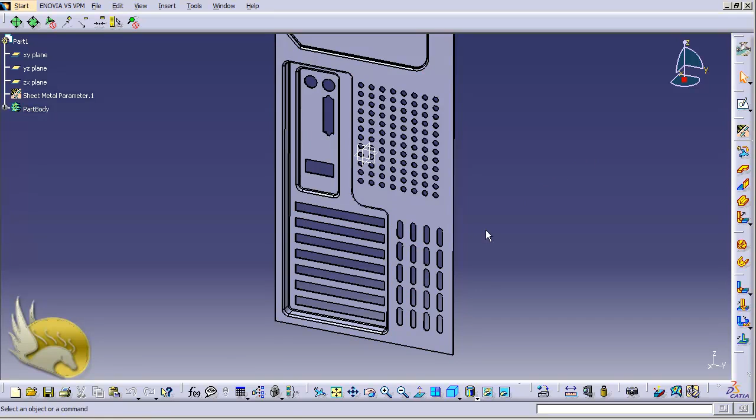Next thing I want to do, I want to add a groove between these slots. For this, I can select this face and click on a sketch so that I'm in a sketch environment. Let's zoom in a little bit and draw a simple line here between two slots. This line is going to be 90 millimeters, so I add a constraint of 90 millimeters here.

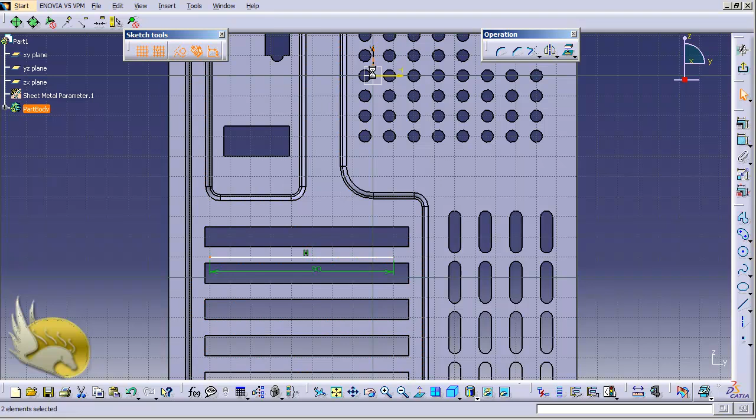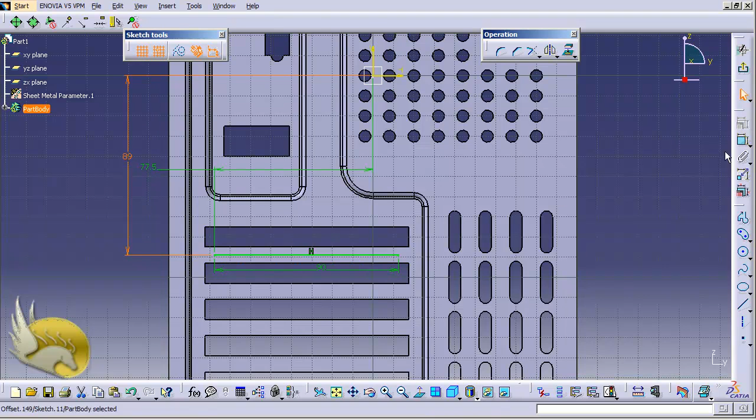Now the left point and the vertical vector are going to be about 77.5 millimeters away from each other. 77.5, and this line is about 89 millimeters away from the horizontal vector. So I type in 89 here. Now by selecting this line, I exit my workbench and go to insert menu, go to stamping, go to curve stamping. I guess I haven't selected this previously, so let's see this.

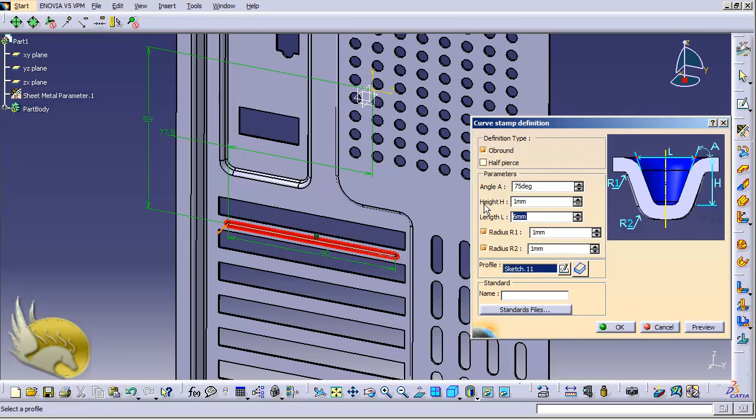And by selecting this, I want it to be outward, so I click on this little arrow to change the direction. I can see the direction is outward. The height is going to be only 1 millimeter, and the length is going to be 4 millimeters. Radii are correct, so I do not touch them. I click on OK, and I can see there is a groove that comes out of this place.

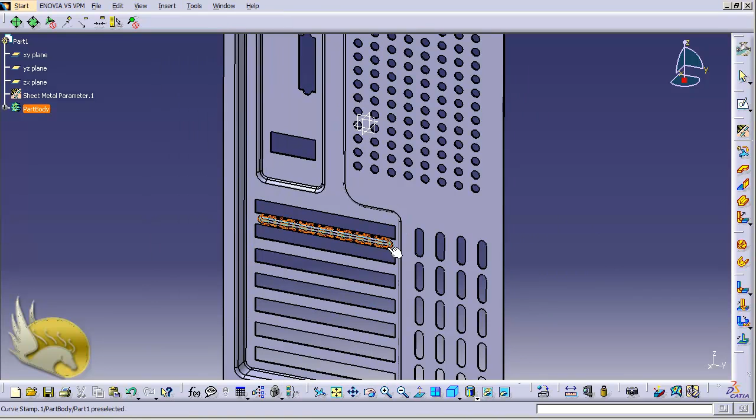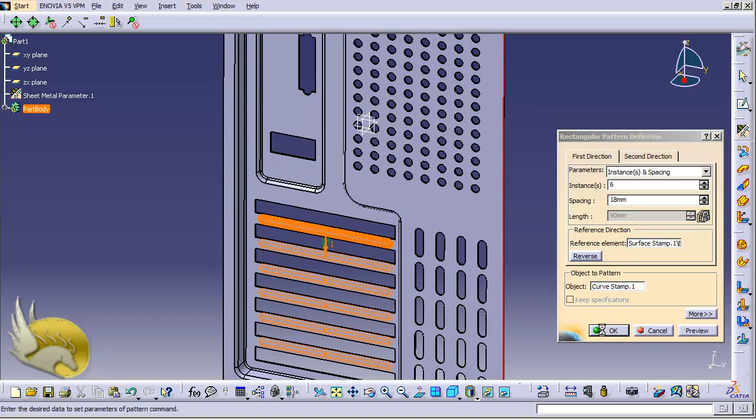Now I want to replicate this, so I go to insert menu, go to transformation and select rectangular pattern and select this curve stamp and make sure that curve stamp is selected. Now 1, 2, 3, 4, 5 and 6 instances. I need 6 instances, and the space is correctly defined because this is the space between these slots. So I click on the reference element and select this direction and click on OK. Everything is correctly defined here.

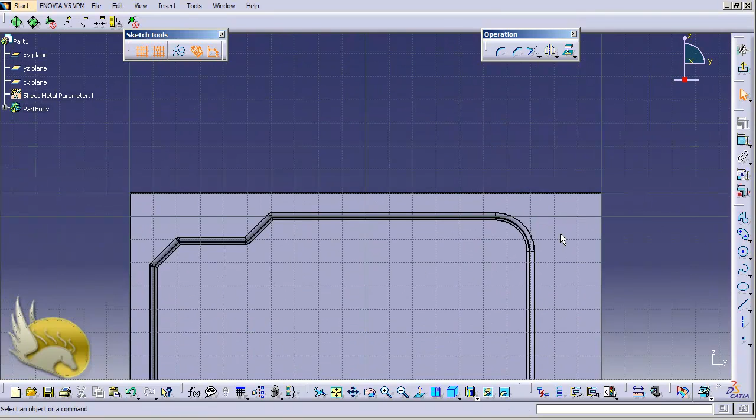Now I want to draw a very complex shape for power outlets and create this profile. So let's go up, and I want to select this face. By selecting this face and going to the sketch environment, I want to draw this a little complex shape, and for this I need 2 axes because I want to make sure that my shape is correctly defined. So let's draw this axis, and another axis is going to be vertical like this. Now by having these 2 axes, let's go to profile tool and start drawing from here.

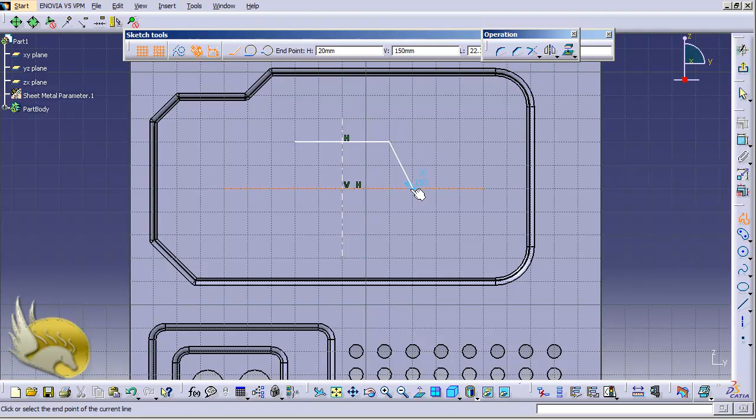This is the first, second point. I want to come down like this, come down like this, go to left, go up, and go up and finish this. Now I don't want to have the extra constraints here. I want to remove this constraint as well. Now I want to have some constraints like this. This point and this point and this axis, they should have symmetry. So I add symmetry here, click OK.

This point and this horizontal axis again should have symmetry. And I want to do the same between this point and this horizontal axis. Adding another symmetry here. I want to make sure that this is 40 millimeters. And the distance between these 2 lines is going to be 20 millimeters. So I type in 20.

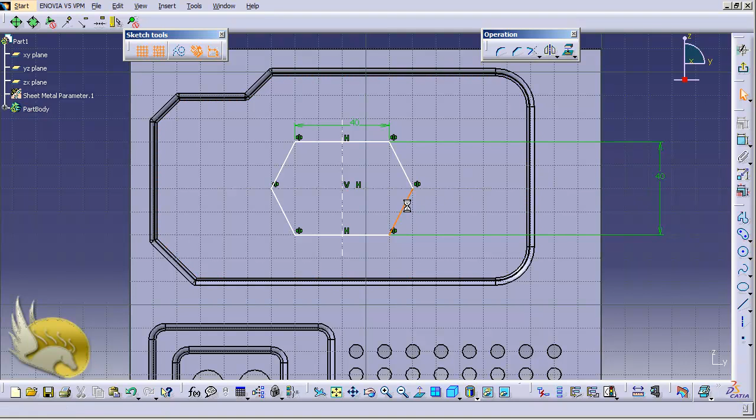Now you can see that it doesn't work like this. I don't want to have it like this. So I guess I have to define some more constraints here. For example, I want to have an angle here between these 2, and this should be about 80 degrees, and it changes shape dramatically. Let's remove this angle for now and see what I should do for the rest of my job.

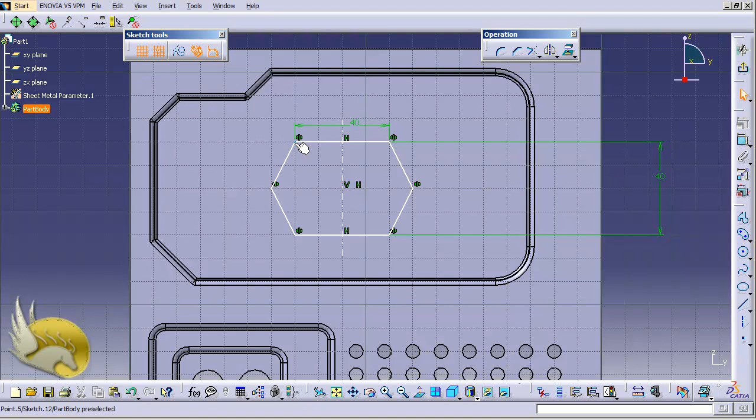I want to have distance between these 2, as it is over-defined. I don't want to have this. Let's see. I guess I need some constraints of symmetry between this point and this point, and this. And now I add another symmetry. Now I guess if I try to change the angle, it would not change it dramatically.

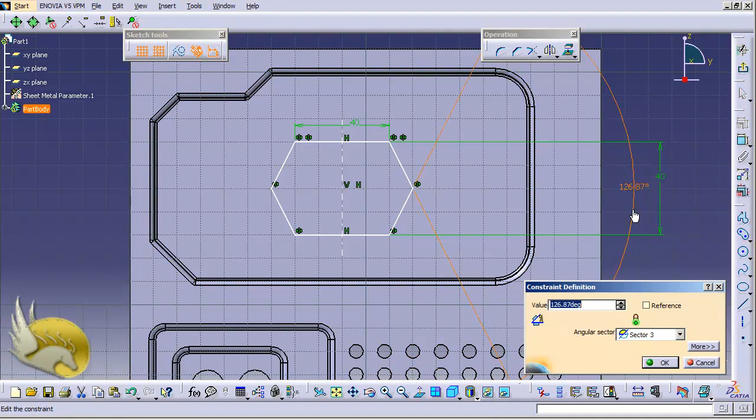And I can see that I need to have this point and this with a coincidence. And again, I do not need to have another coincidence because this is in symmetry with this line. And now that I have this, let's add another angle here. I want to have 80 degrees. And I guess this is going to be 80 degrees and this is over-defined, so I do not add this.

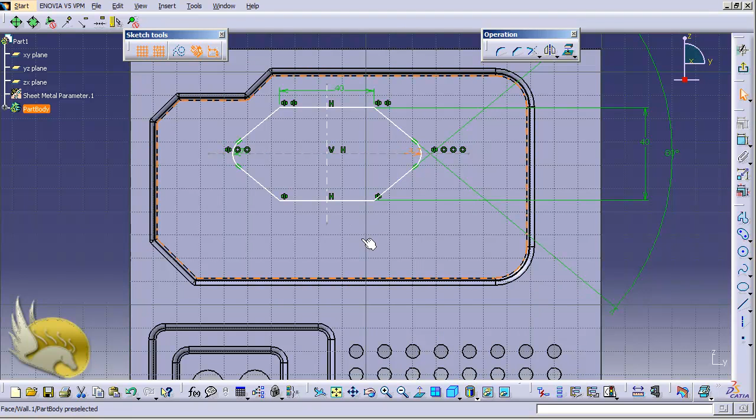Okay. Now let's select these two lines and add a corner. By adding this corner, I make sure that I have 7 millimeters. And selecting these two lines, add another corner with 7 millimeters of radius here. Now I have it. The only thing that remains is to move it to the correct place. And of course the distance between these two lines should be 22 millimeters. So I want to add it. Now you can see that I had this previously. I should change it only. Now it is correctly defined.

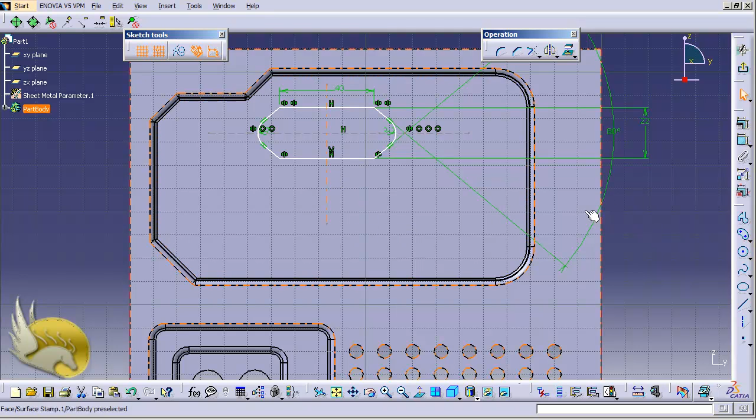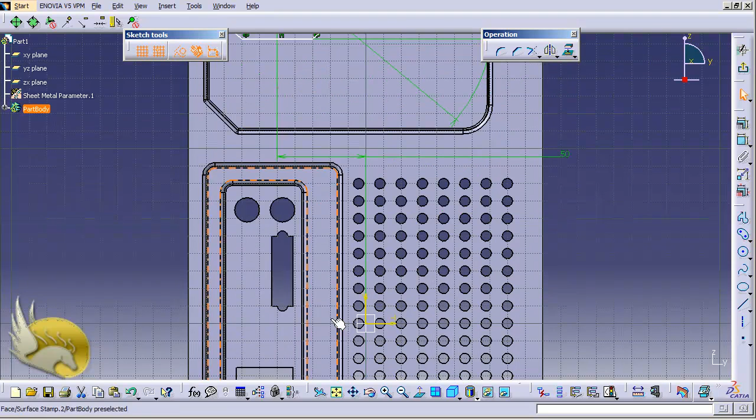Now I select this vertical axis and let's select this vertical vector here and add a constraint, and they should be 50 millimeters away from each other. Now by selecting this, you can see that the whole shape is going to move to the left. And this horizontal vector is about 170 millimeters away from these, and I change it and you can see that my shape is fully defined like this. So I exit my workbench.

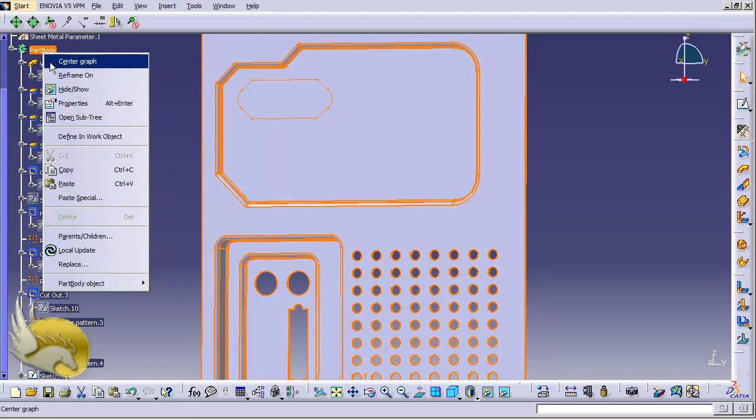And I need to have another copy of this exactly down. So let's go and select this sketch and copy it, paste it on part body, and by pasting this, now I have the same sketch here, but I should double click on this and change this constraint to 135. And I can see that there is an exact copy of that sketch here.

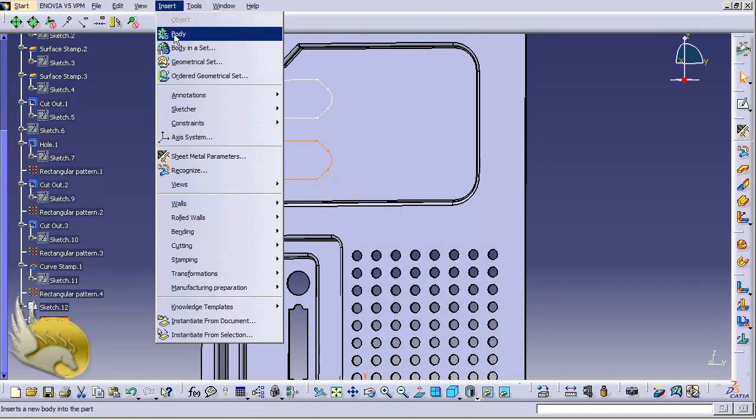I exit my workbench and I go to insert menu, go to cuttings and select cut out, and up to last is selected. This is done. Another one, sketch 12 was selected. Go to insert menu, go to cut out tool and select up to last again and click on OK. Now you can see that I have two openings here.

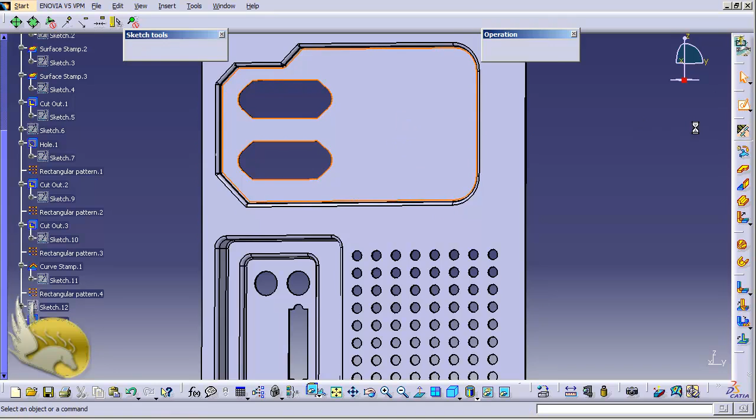Now the next thing that I want to have is there are some profiles here that are going to be for air ventilation. I mean the air ventilation of power supply. So I select this and go to sketch environment. Now I want to have a cylindrical elongated hole and I want to draw it here. Now the first thing I will need is an axis. So I draw axis here and make sure that this is vertical.

Of course this is not necessary, but I can go to insert menu, go to profile. In predefined profiles I can select the cylindrical elongated hole. Now I select the center here. Now I want to start the elongated hole from here and end it here. And you can see there is a coincidence here. I don't want to have it, of course, or I may have it. I can click here to end it, like this.

Now, the first thing I want to do is this. I want to select this inner line and make sure that there is 15 millimeters of radius here. So this is going to be 15. The distance between these 2 points, the outer points I mean, here and here, they should be 18 millimeters. And I double click here, I type in 18.

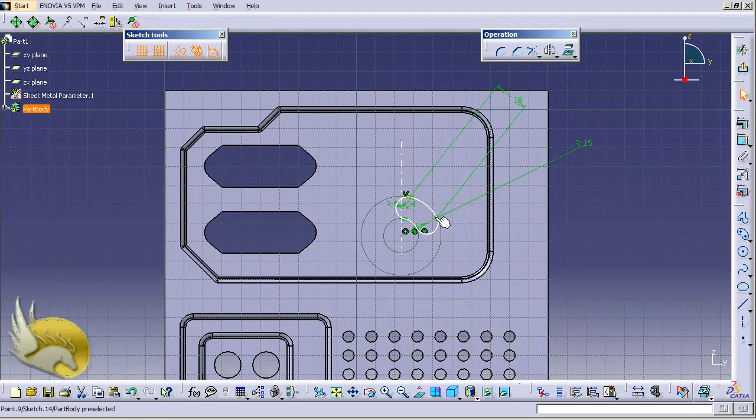And let's select again this point and this point. It's a little hard to select them. And select this axis and make sure that there is a symmetry. Now I need to change the radius. So I double click on radius and make sure that this is 3 millimeters. So this is created like this. Okay, now I can exit. No, I need some more constraints first.

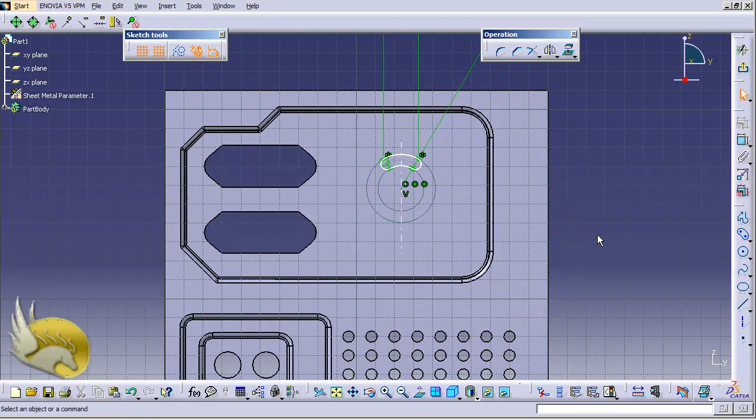The first constraint I need is the distance of this horizontal vector and the center of this. So let's select the center and add it. And they should be 155 millimeters. Now I select this axis and this vertical vector and make sure that this is 25 millimeters. So that's it. This is fully defined.

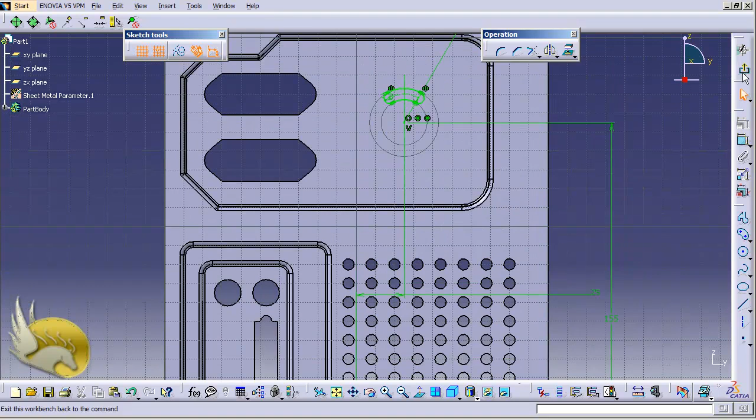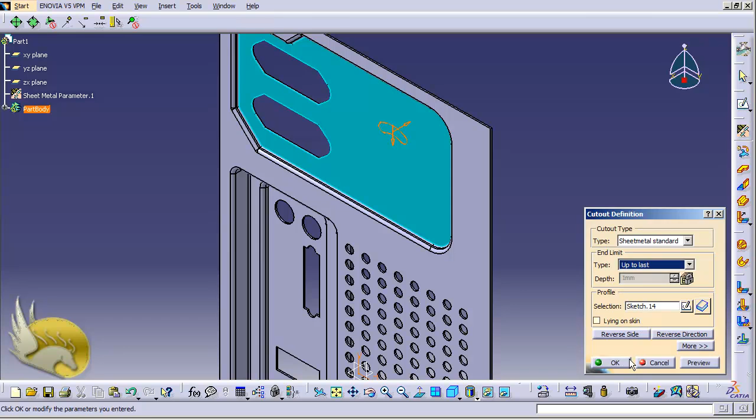And I can exit my workbench and select cut out tool. And it should be where I am. I am under generative sheet metal design environment. And I can find it from cut out here. And up to last is selected so that I can create a hole like this. Now let's rotate a little bit. I want to have several instances of this here.

For this I can go to insert menu, select transformation, select circular pattern, and select this cutout. Now the problem is I do not have a reference element. The reference element can be one of the axes. I don't want to select these axes. Or it can be a line, and I want to create a line here that goes through this face. So I select create a line, and the type of line that I want to create is point and direction. So I select point and direction here.

Now I need a point. I do not have a point here, so I right click on point and click on create point. Now by creating the point, I want to have this point as the center of circle, sphere, or ellipse, and I can select one of these arcs. Both will be the same, so I select this. Now you can see the point here. I click OK. The point is selected by default.

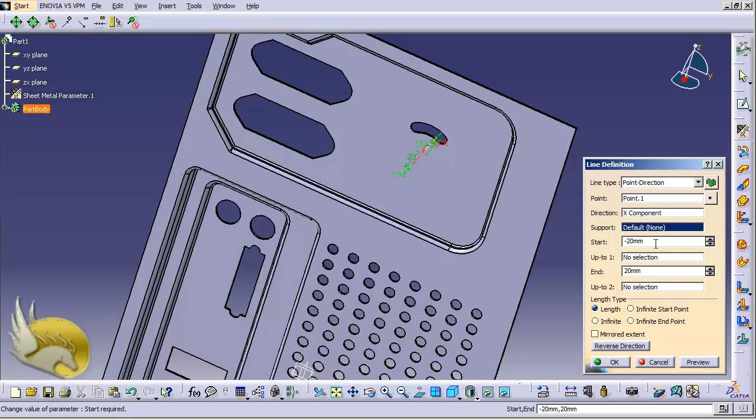Now I need the direction. The direction is going to be X direction that exactly cuts through the face. So I select X component. Now it can start from -20 and finish in 20. Just to show you what this is looking like. So I click on OK. Now I have the line, and you can see that I have a reference element here.

Now I need to have 4 instances, and these instances should be 90 degrees away from each other. And you can see that this is not aligned correctly. I can click on more, and now there is a radial alignment here that I can click on, and you can see that now they are aligned correctly.

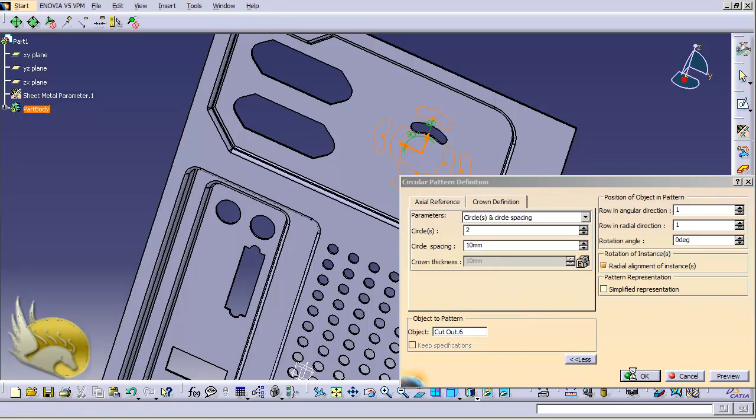Now I need to have a crown definition because I want to have several rows of this, and actually I want to have 2 rows. So I increase it to 2, and the distance between these two should be 10 millimeters. So I type in 10 here, and now you can see a preview of what I am creating here. I click on OK, and that's it. Now the replication is done, and that's very nicely created.